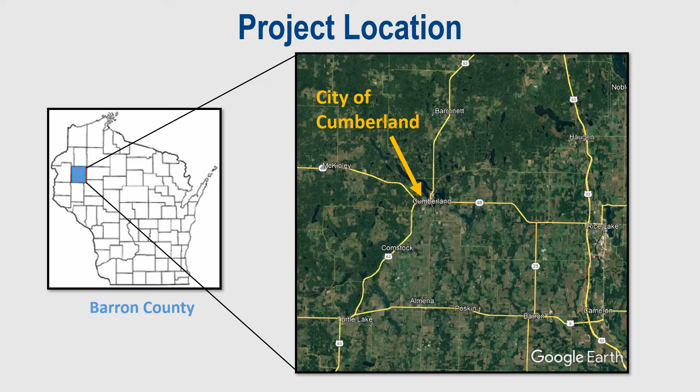The project limits extend from 500 feet west of the intersection of US 63 and Wisconsin 48, also known as 14th Avenue, through the city of Cumberland following US 63 to the intersection of Charrie Lane.

There are two areas of note along the project corridor. The first is a 1-block-long addition of construction activity off the mainline project along Wisconsin 48, also known as Elm Street, between 1st and 2nd Avenue. The second is the area over Beaver Dam Lake, which will be addressed by a future project.

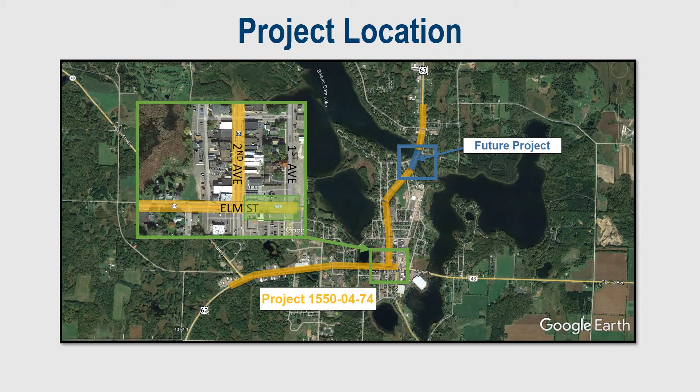Previous plans included a structure replacement at Beaver Dam Lake. Preliminary reviews indicate that including the structure would risk delaying the mainline project. As a result, the two projects were separated and will continue to move forward, each on their own timetable. This presentation will focus only on the resurfacing of US 63.

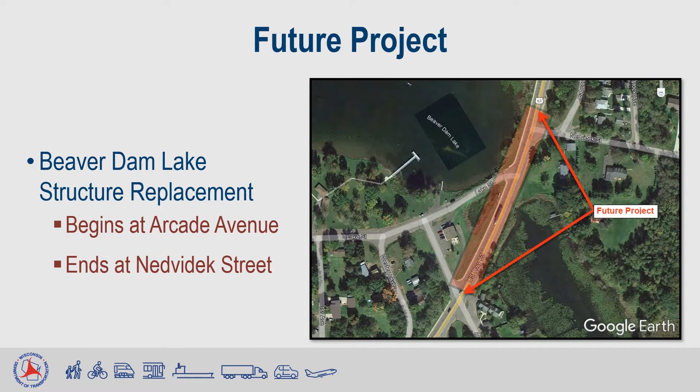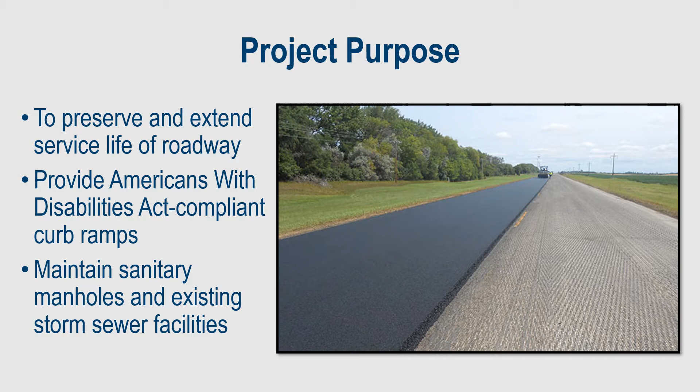WisDOT is proposing to resurface US 63 to preserve and extend the service life of the roadway, provide Americans with Disability Act compliant curb ramps, and maintain the existing storm sewer inlets and sanitary manholes.

US 63 was last resurfaced in 2002, and its pavement is displaying various signs of cracking. Numerous curb ramps are not ADA compliant. Curb and gutter is showing signs of wear, including cracking and/or sinking in several locations, which can slow roadway drainage. Manholes and inlets are deteriorated, and their repair may be included as part of this project.

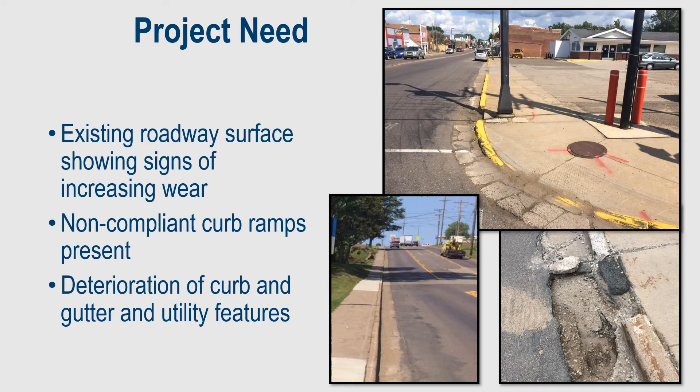The proposed work would consist of removing 3.5 inches of existing asphalt and replacing it with new asphalt of equal depth. It's expected that this treatment would provide a maximum service life to the roadway without the need of a reconstruction. Replacing curb and gutter in some places and grinding the concrete gutter pan and overlaying it with asphalt in other places. Replacing curb ramps so they are ADA compliant to the maximum extent feasible.

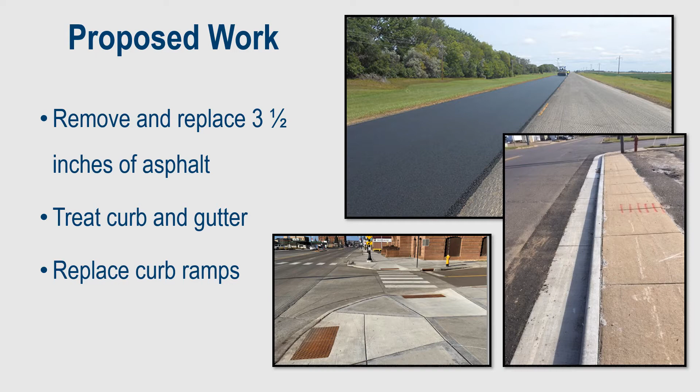Additional work would consist of replacing sidewalks and select driveway entrances that are in the worst conditions and pose the greatest hazard to pedestrians. Repairing 9 sanitary manholes along 2nd Avenue between Elm and Veterans Street at the request of the city. Adjusting electric pull boxes and water valves that are present in curb ramps, sidewalks, and driveways.

All water valves in the proposed construction zone should be tested in the months leading up to the work to ensure that any replacement parts are on hand during construction to avoid costly delays.

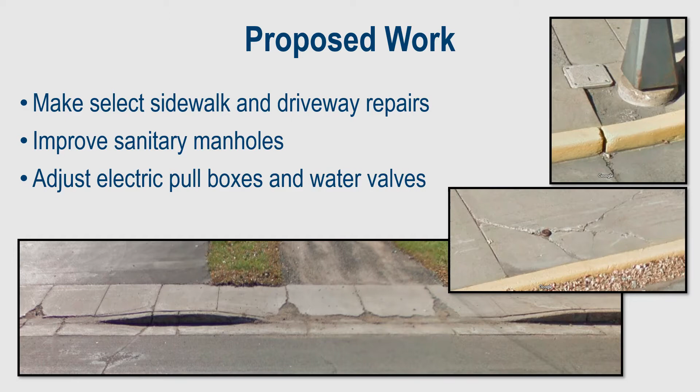Projects of this magnitude provide an opportunity to evaluate the roadway for safety. This includes evaluating access points or driveways that can be eliminated or shifted to a side street. Studies have shown that the risk of collisions is linked to the number of entrances to a roadway, especially when near an intersection. 9 properties are being evaluated for possible safety improvements.

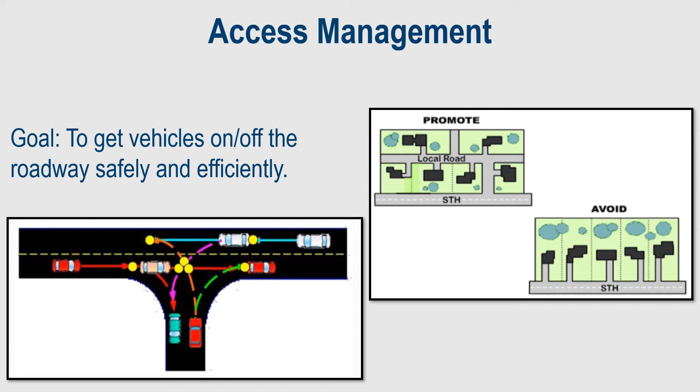Some design features that are being considered are adding curb ramp bump outs, which provide the space needed to achieve compliant curb ramps and increase safety for pedestrians by shortening the time and distance pedestrians spend crossing the roadway. Marking bike facilities is considered on all new urban rehabilitation and reconstruction projects as part of WisDOT's mission to provide transportation mobility to all the traveling public.

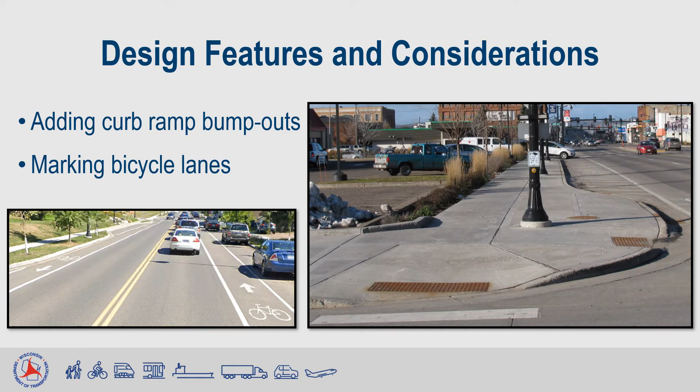Additionally, with the goal of reducing the risks associated with left-hand turns, the department is considering extending the existing two-way turn lane eastward to near the intersection of US 63 and 3rd Street. Expected benefits would include improved traffic flow for westbound travelers, as well as providing traffic calming by reducing the effective driving lane width.

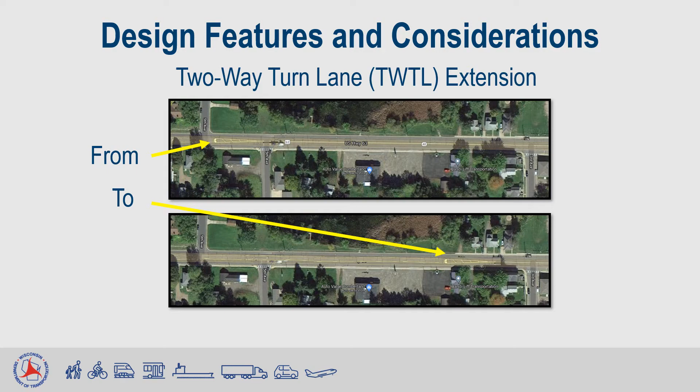From time to time, there may be need for construction activities to cross onto private property. When this happens, an arrangement is made with the property owner, generally taking one of two forms. Temporary limited easement grants the construction crew temporary access to well-defined areas outside the right-of-way. Permanent acquisition is a permanent transfer of ownership to the state. This project only intends to use this option if it is found that small sections of sidewalk or roadway fall outside the right-of-way.

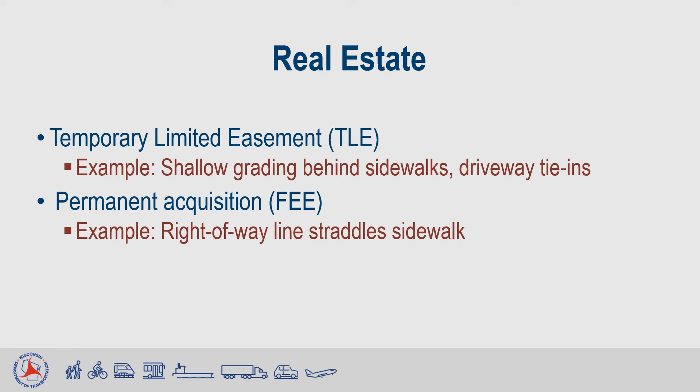During the design process, many environmental factors are considered in order to evaluate the effects the project may have on the area. To do this, the department turns to subject matter experts, such as biologists, archaeologists, and historians, to paint a fuller picture of the surroundings. That said, the department knows that the biggest subject matter experts on the city of Cumberland are its residents. For that reason, we are seeking community input on the project's planned activities near areas of historic interest.

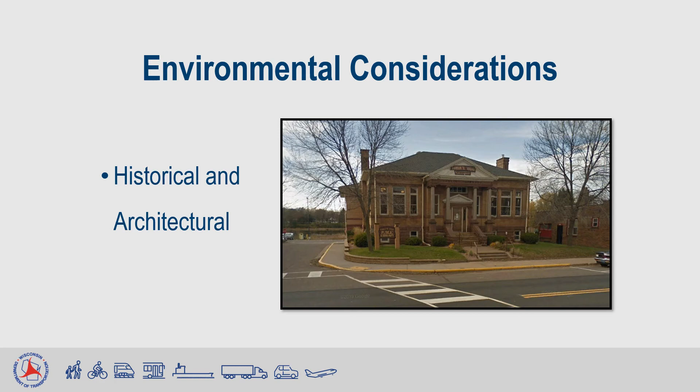Project plans and other information can be found on the project website. Check back often for news and updates.

While the exact schedule has yet to be finalized, construction will likely occupy large portions of the summer and/or fall of 2025. Temporary lane closures and use of flaggers is expected. It's the department's intention to ensure that roadways and sidewalks are fully open during holidays and major event weekends, such as Memorial Day, Independence Day, Labor Day, and the Rutabaga Festival.

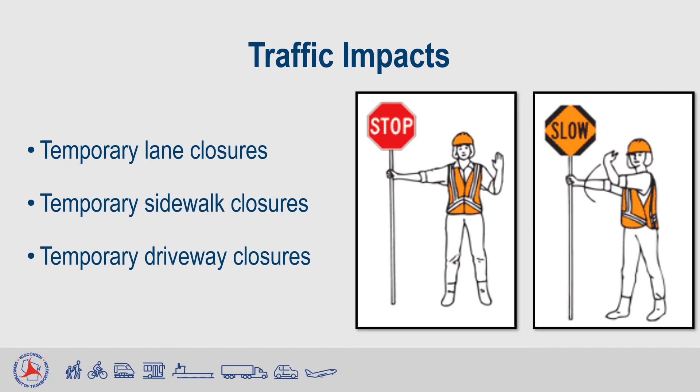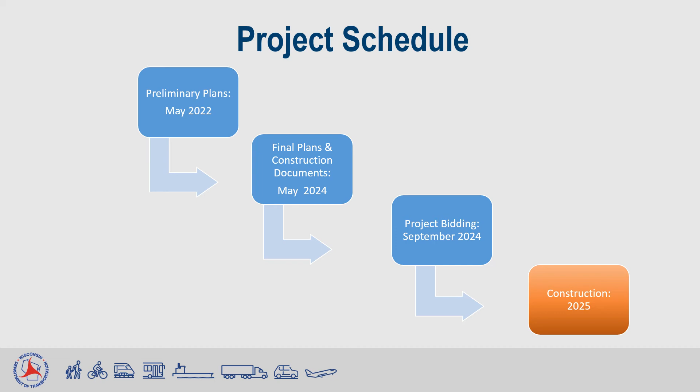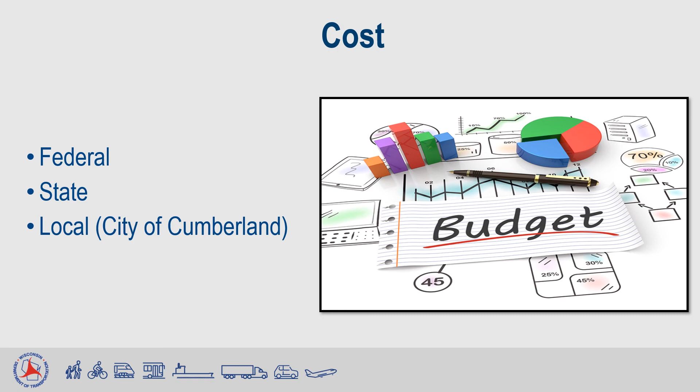This project would be paid by a mix of federal, state, and local funds. The signed cost share agreement dictates an 80 to 20% split, with federal and state funds covering the larger portion of the expense. Any additional work that the city has requested would be covered 100% by the city.